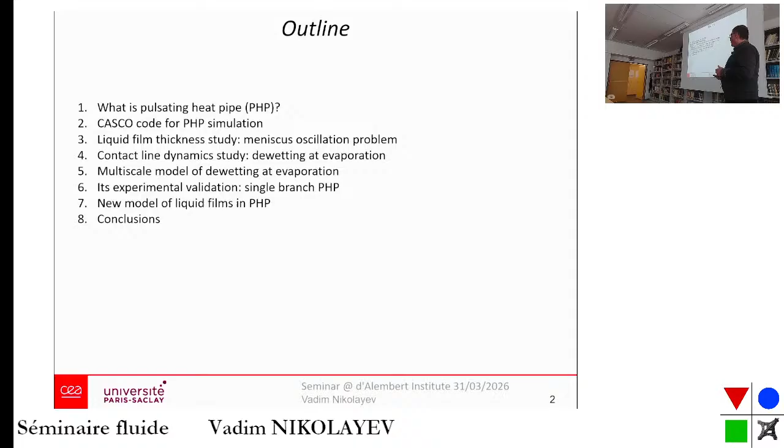So first I will explain what it is. Then I'll tell a little bit about the design of PHP, a method of this design, which is the only way of designing it - it's direct simulation, in fact, because it's too complex. Then I will tell about some bottlenecks in the simulation models, which concerns the liquid film modeling. First, I will speak about the liquid film thickness modeling, and then liquid film length modeling, involving the contact line dynamics. Here I will speak a little bit in more detail about the dewetting at evaporation. And then I will conclude.

So what is the pulsating heat pipe, and heat pipe in general? It's a device that serves to transfer heat from one point to another - either to cool down electronics or just recover the heat, whatever. It makes use of reversibility of latent heat exchange. So what happens is that you evaporate at one side, you accumulate the latent heat in the vapor, and then you transfer the vapor to the condenser part, you condense it, and you give back this latent heat, basically.

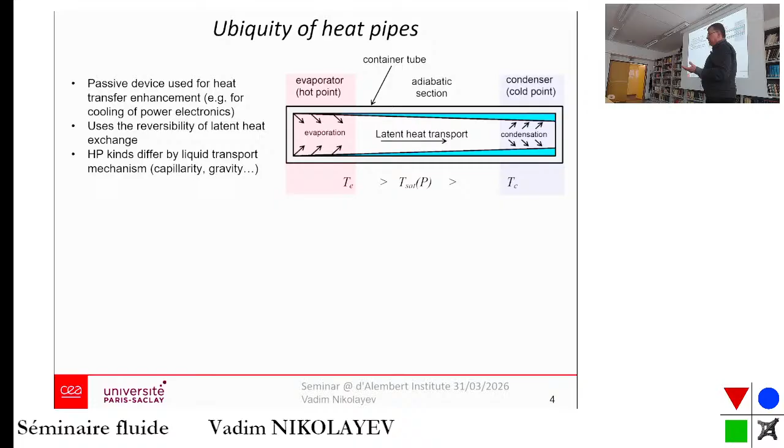So heat pipe kinds differ by liquid transfer, because vapor is transported just by its expansion, right? When you generate more vapor, it proliferates easily. But the liquid is another story - you need to transport liquid to the evaporator part, and this is done in many cases by capillarity. For instance, in every mobile phone now there is a liquid which circulates that cools down its processor, and it's the case of all mobile phones now. In every computer, in every more or less powerful heat-emitting device, there is a heat pipe now. Here you have, for instance, the Hubble Space Telescope cooling system.

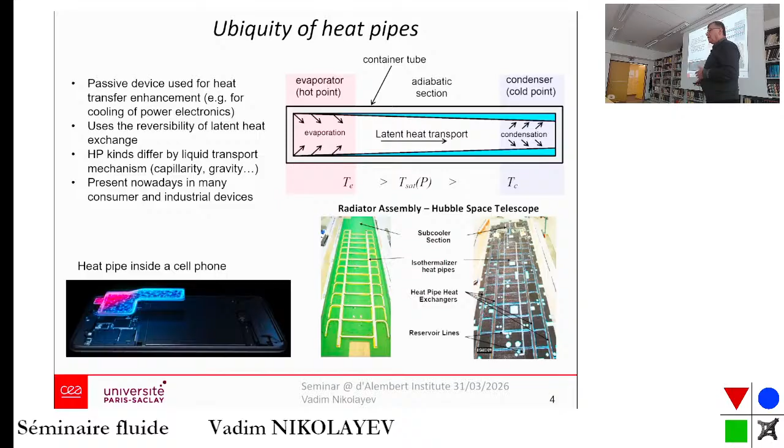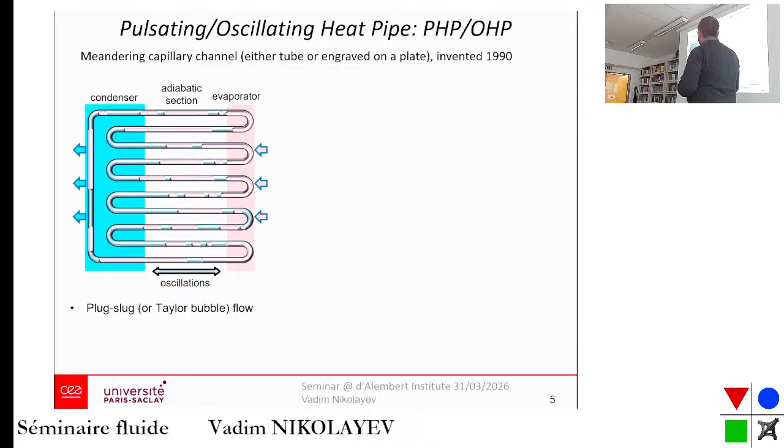So what is the pulsating heat pipe, called in some parts of the world - in China and in the United States - oscillating heat pipes? It's the same thing. It's a very simple structure - a meandering capillary channel, a tube or engraved on a plate. It was invented, by the way, quite recently with respect to other kinds of heat pipes. So it's a meandering capillary tube. You put some fluid inside and they form liquid plugs and vapor bubbles inside, and when you apply a difference of temperatures at the condenser and evaporator parts, a miracle happens: the whole train of bubbles and plugs begins to oscillate spontaneously.

So you see here an example of such an oscillation, and such a device is very attractive for industrial applications because it's very simple, reliable, light, and easily integrable - you can configure it for any geometrical configuration - and in addition, it's extremely efficient. It can transfer kilowatts without any problems, just because fluid motion washes the dry areas once they are formed. Because the problem for capillary heat pipes, for instance, is that at some heat flux you have dry-out of the evaporator part, and it ceases to function. Here you have motion of fluids, so it helps to increase these limits, the maximum heat flux limits.

However, it involves multiple length scales. The channel length for this one, for instance, is 50 grooves of 27 centimeters - it's about 14 meters, a big length. And you see that there is some correlation of motion on this length, so you have a proliferation of some waves, pressure waves. So you have a kind of collective motion, which is a very interesting phenomenon to be studied by itself.

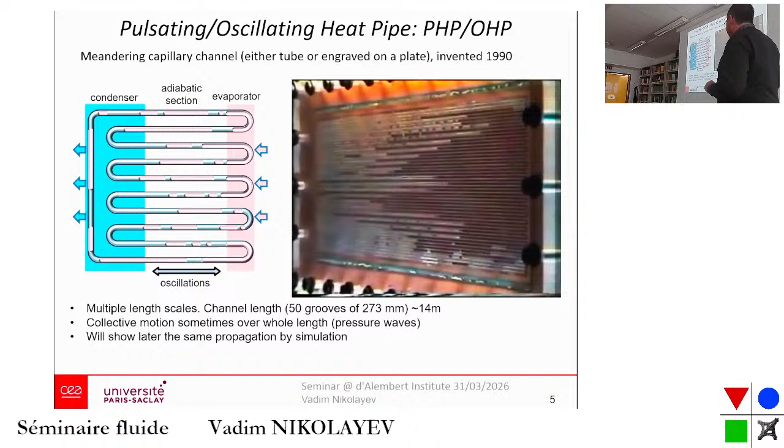But I didn't find any better, so I will show later the same propagation of waves by simulation.

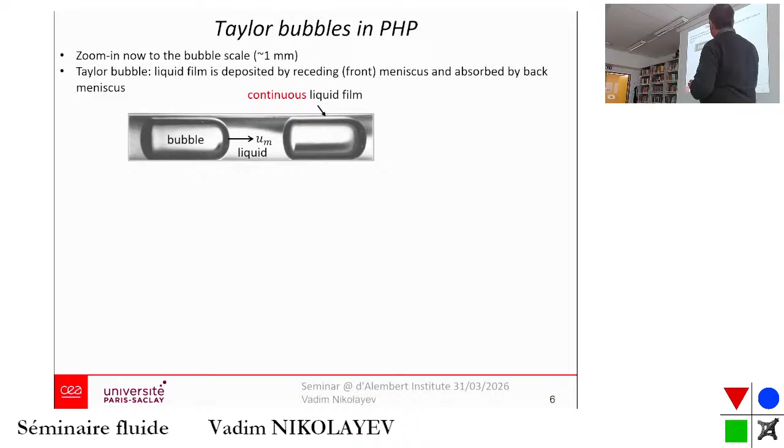So let's now go down to scale, to the millimeter scale, which is the scale of the Taylor bubbles inside the PHP. And when there is a motion of such bubbles squeezed in a channel, you have a deposition of a continuous liquid film on the walls of this channel.

The thickness of this film is given by the formula derived by Aussilou and Quéré. It's a very well-known correlation, which involves the capillary number related to the velocity of motion of the menisci, the deposit, actually, the film, the front menisci, which recede and deposit the film.

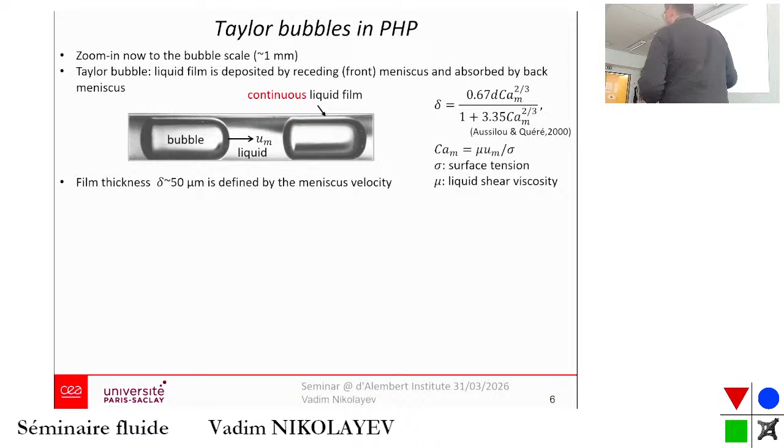The characteristic film thickness is of tens of micrometers, and it is defined by meniscus velocity through this expression. However, the particularity of the pulsating heat pipe is that the film partially evaporates, thus in the evaporator, creating the triple contact lines.

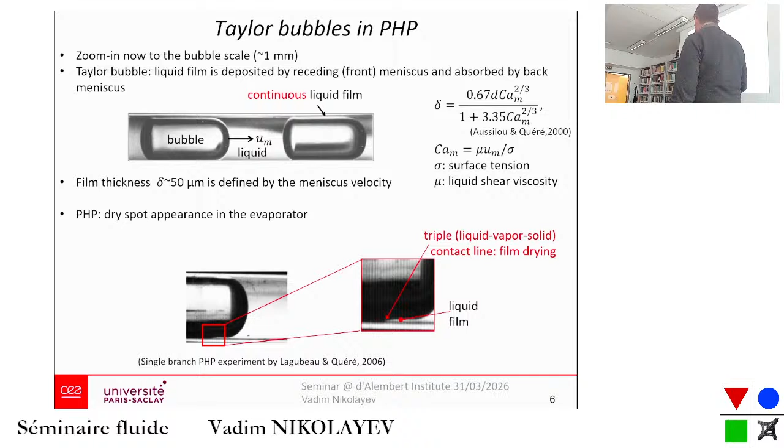So now I will tell a little bit about designing of PHP and the code we developed. It's French, it's called CASCO, a French abbreviation for Advanced PHP Simulation Code: Code Avancé de Simulation de Caloduc Oscillant, which is a pulsating heat pipe in French.

Why 1D? Because we need a tool to design the PHP, so the simulation shouldn't last for weeks. It's a trade-off between code veracity and efficiency. But we can simulate only the bubbles of tube size.

So the simulation procedure consists in virtually breaking the PHP loop, projecting it on a straight axis on which the evaporator, adiabatic, condenser zones are situated in a periodical fashion.

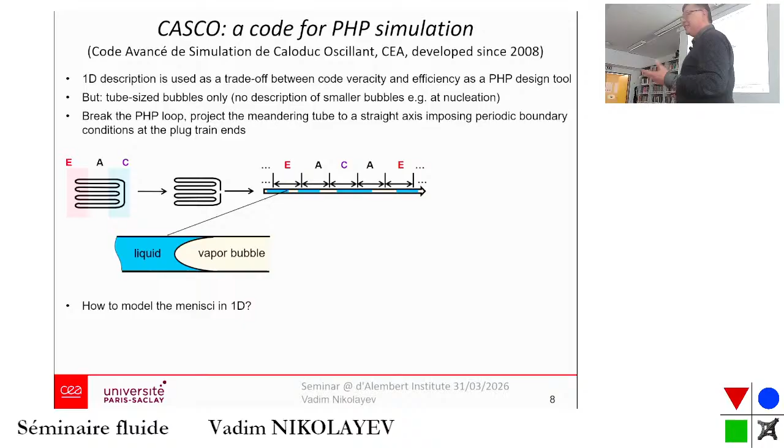So the problem arises how to model the menisci in 1D. What we do, actually, is we replace the curved meniscus by a flat interface with attached films.

And when we simulate the bubble, we need to admit an arbitrary number of dry spots along it, because the bubble can be so long that it extends over several evaporator sections.

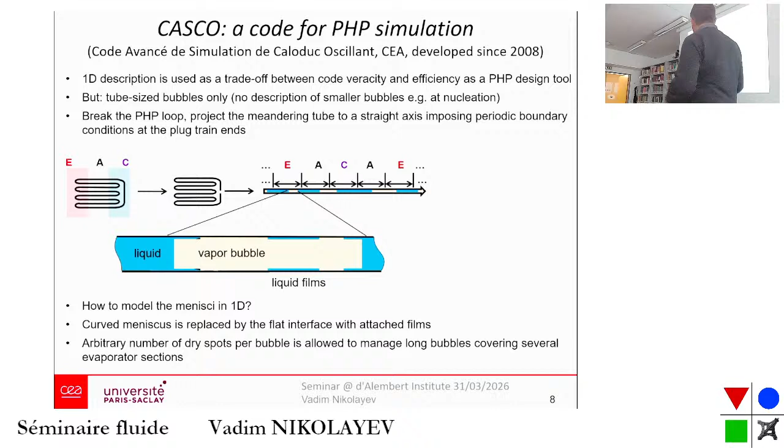So what about internals to CASCO? It's limited to the plug-slug flow regime, so it's bubble plug, but in engineering we call it plug-slug.

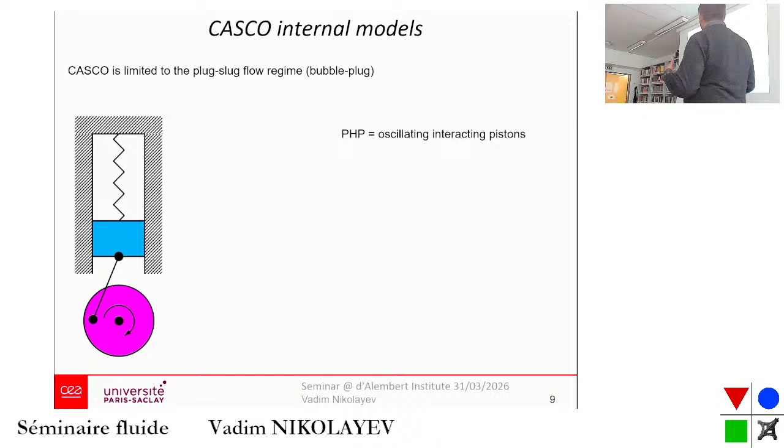So we simulate the pulsating heat pipe as a set of oscillating, interacting pistons, and they're interacting through the elastic medium, which in this case is compressible vapor.

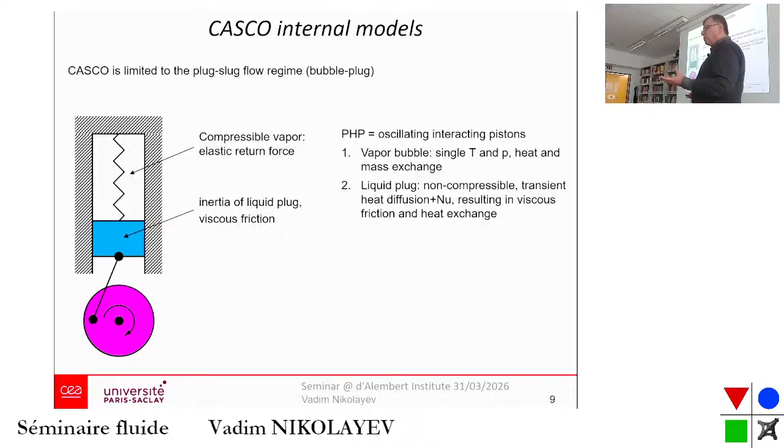And it creates the elastic return force in this system, without which the oscillations are impossible. So the liquid plugs create the inertia and, of course, a viscous friction, which limits the oscillation amplitude.

And the motor of oscillation is the phase change evaporation-condensation, and mainly it occurs through the liquid films deposited on the tube walls.

In addition, we need to simulate the bubble and plug appearance and disappearance: bubble coalescence and bubble creation, basically by boiling.

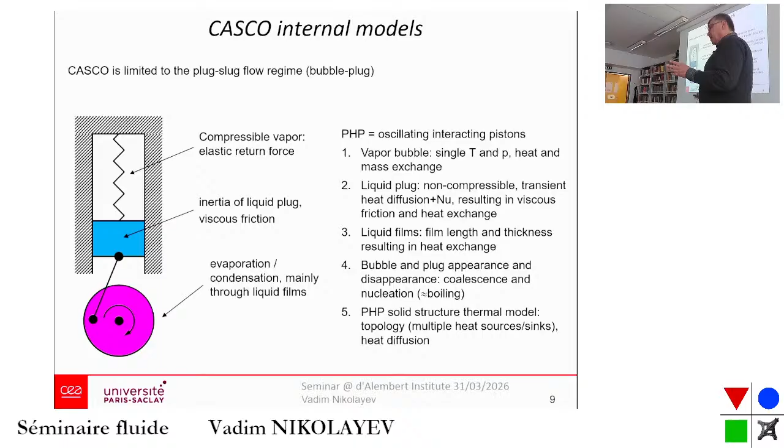And we need to simulate also the heat diffusion in the PHP solid structure, which is an important point, and it takes a lot of simulation time, actually.

The CASCO general structure begins with its initialization. Then you progress in time and solve one time step for all these models I described.

However, there is a particularity in the system, because some plugs or bubbles may become negative numerically, so you need to cure this. If you progress with such negative things, it becomes absurd and the code collapses.

So you need to actually break from this loop, eliminate the bubbles and problematic plugs, and return to the beginning of this time step.

Yes, I mean, negative length or negative mass or whatever, negative temperature, well, something abnormal.

So you need to cure this issue, and you return to the same departure point, and you redo this time step.

And after this time step, you need again to check if everything is all right, and if other transformations of the system are needed, like adding of bubbles, for instance, if local conditions of boiling are satisfied. Then you save the PHP state if requested, and you return back to perform the next time step.

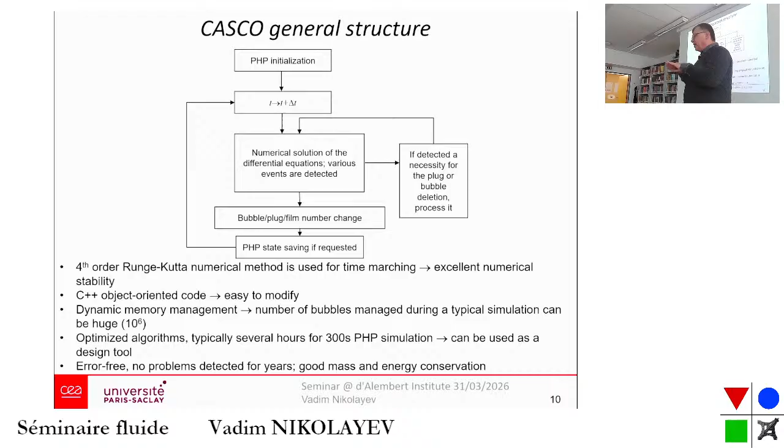The code now is error-free, no problems detected for years. It provides very good mass and energy conservation, so we don't need to reinitialize the mass by perturbing the system on the run.

I'd like to speak about the most important bottleneck in this code, which is the liquid film model. The films are modeled with constant, imposed film thickness. We need to implement something really simple in this model, so we chose this way.

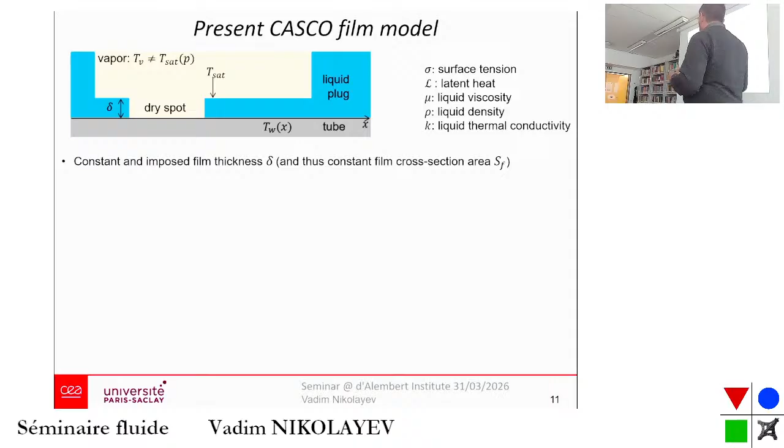Every film has a fixed thickness delta, and evaporation-condensation mass flux is defined by the interfacial energy balance. It's a classical way of describing evaporation or condensation of the film: the heat flux arriving from the wall is balanced by the latent heat generated at the liquid-vapor interface.

Another point is the film length. As the films are of constant thickness, we need to conserve the mass. So what we do is provide such a velocity of the film edge, the contact line, to conserve the mass. It's basically driven by condensation or evaporation: you evaporate, you reduce the film length; you condense, you increase the film length.

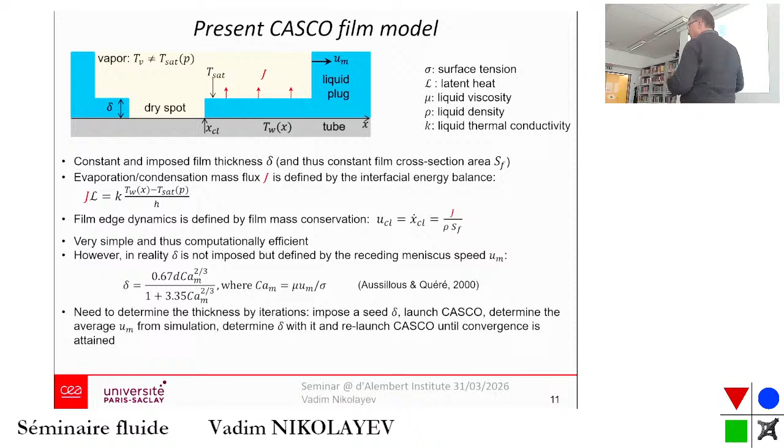This method is certainly very efficient computationally, but in reality things are very different. First, the film thickness is not imposed, but defined by the receding meniscus speed, so we need to adjust somehow the thickness, which we don't know in the beginning.

What we do right now is a loop outside CASCO: we impose some thickness, launch CASCO, determine the average plug speed from the simulation, then inject this plug speed into the formula, calculate a new thickness, and so on until this procedure converges. Actually the convergence is extremely quick, so just a few iterations are sufficient.

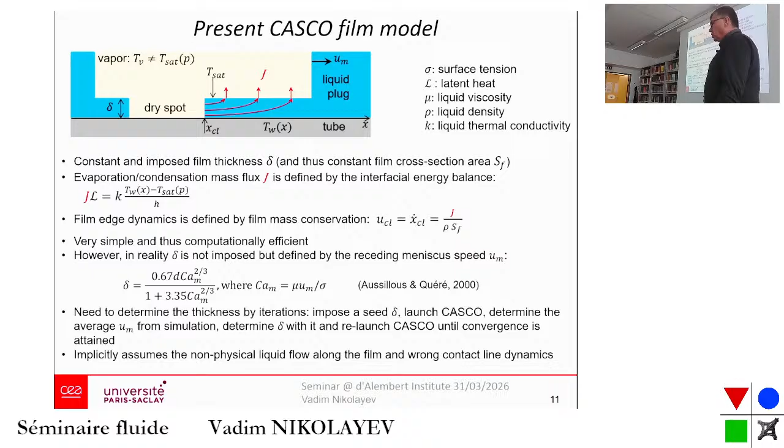The main problem is that we assume the flow along the film, which is physically incorrect. For instance, at evaporation we reduce the film length, so we assume this mass flows along the film, which is absurd. In addition, the contact line dynamics is completely wrong. We need to cure all those issues.

However, the code works quite well. I'd like to speak about one application we do in collaboration with Airbus Defence and Space, for cooling power electronics of satellites. This is not, of course, the industrial prototype, it's more a test prototype. I don't have the right to speak about the industrial things, obviously.

It's a 16-turn tubular PHP made of copper with 1 millimeter internal diameter. It has 2 aluminum spreader plates which serve as condenser and evaporator. Here you see its size; it was the subject of a postdoc by Slaven Basić, which ended just 3 months ago.

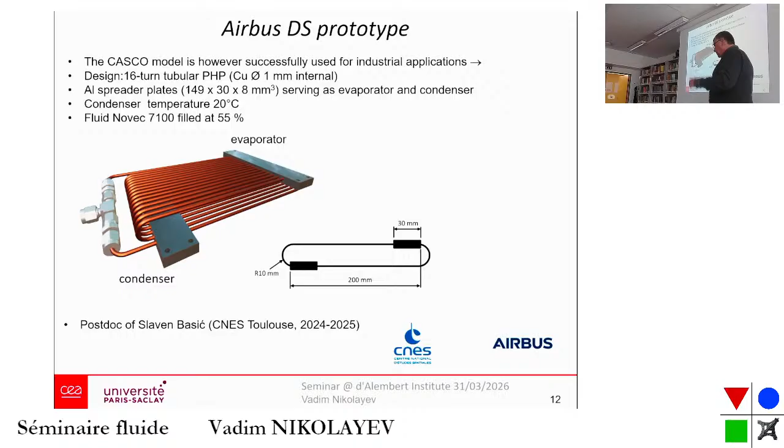Here is a CASCO backend visualization of the PHP functioning. The color code: blue is liquid plugs, violet and gray are vapor bubbles, and violet is liquid films. So you see the drying and rewetting of dry spots by oscillating liquid plugs, and also those pressure waves propagating in the system, making this motion collective.

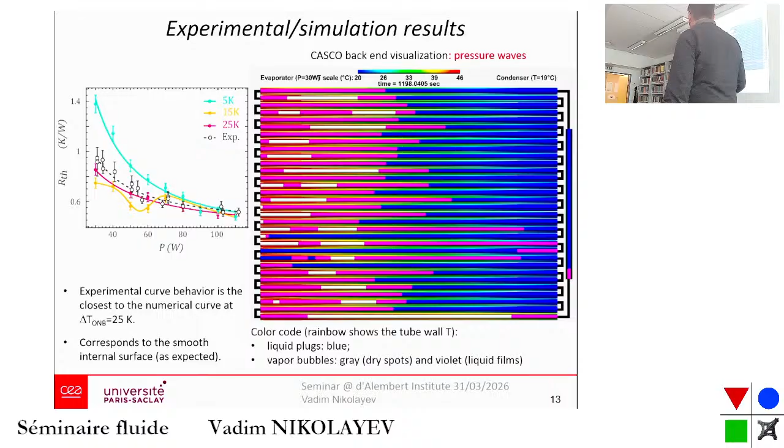This is quite an efficient mode of functioning, but there are many others, of course. What happens is that when you plot the thermal resistance of such a device with respect to the input power, you get this decreasing curve, which is characteristic for heat pipes.

These are experimental data, the symbols, and you have several simulation curves. The parameter of these simulation curves is what we call the ONB threshold, or onset of nucleate boiling threshold, sometimes called the nucleation barrier, which is actually the superheating of the tube needed to generate vapor bubbles. It's a very important parameter because boiling is extremely important in this system.

You see that the agreement with the experiment is provided for this value of 25 Kelvin, which corresponds actually to quite a smooth internal surface, which is expected for this experiment.

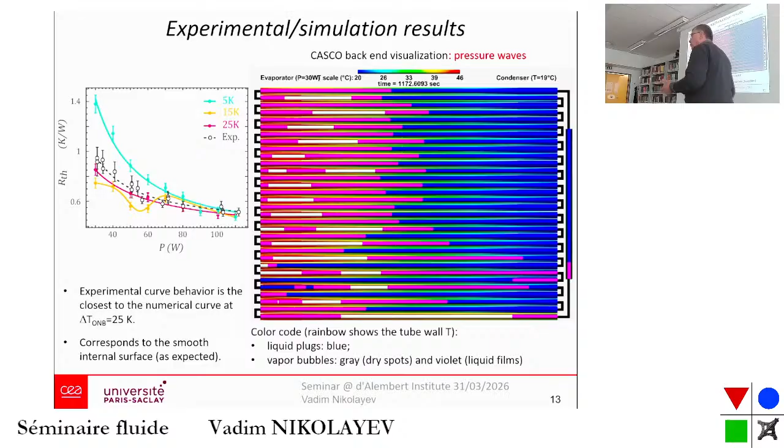Let's speak about the liquid film thickness study, and I will speak about the meniscus oscillation. What we do is try to calculate what happens in a tube, what happens with the liquid film attached to the meniscus, when you oscillate the meniscus.

When it goes back, it deposits the film. When it runs over the film, it absorbs the film. So it's a Bretherton-like problem for the film thickness.

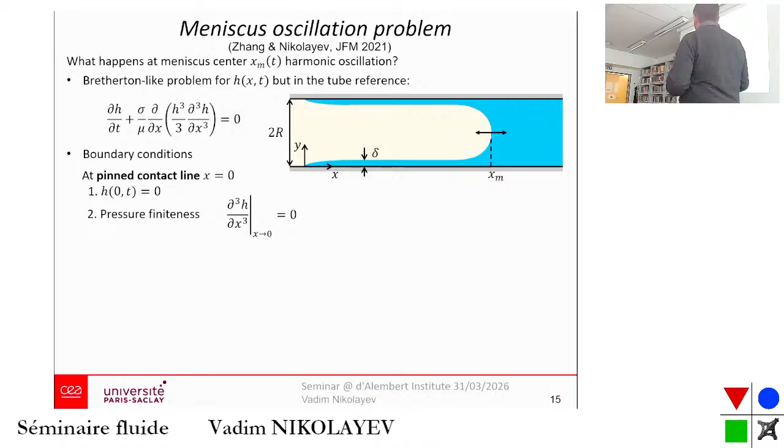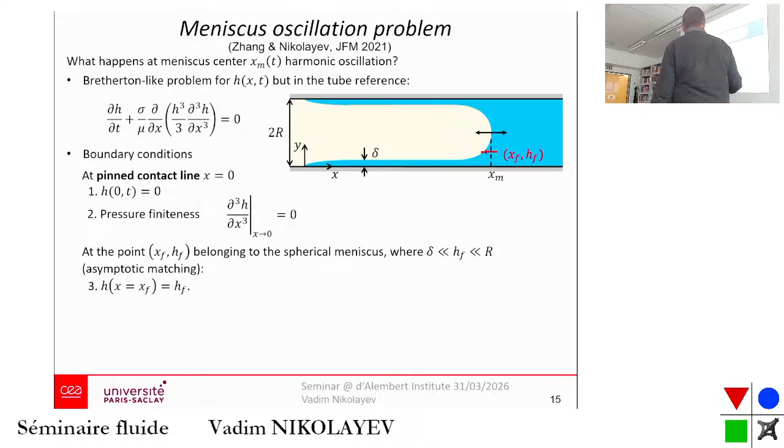We solve it in the tube reference because of the oscillation, unlike the Bretherton problem. The contact line is pinned, so we do not consider what happens near the contact line in this part of our study. The pressure is finite, so there's no singularity problem at the contact line, and boundary conditions on the other side are introduced at a point which is quite high, where the film is thick—much larger than film thickness, but much smaller than the other scale in this problem, the tube radius. Thanks to this scale separation, we can make such a hypothesis.

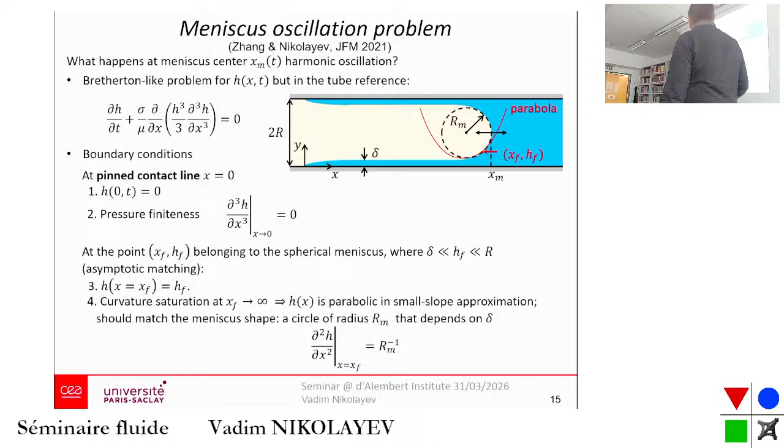As the curvature saturates when you go further away from the contact line, we have a parabolic solution in the small slope approximation, which is the lubrication approximation used here. It should match the meniscus shape, which is spherical—the profile is a circle of radius Rm that depends on the film thickness itself. So we need to solve this problem, and the result is here, compared to the experiment which was done just for liquid plug oscillation.

You modulate the pressure from one end of the tube with some periodic pressure changes, and the pressure from the other side is fixed. It was done with pentane in contact with its vapor.

You see the position of the plugs. There is one phase where the meniscus of the liquid is receding, and on that stage you deposit the film, and the film has inhomogeneous thickness in space just because the velocity of the plug changes in time. So it can be compared to this experiment where people measured the film thickness locally.

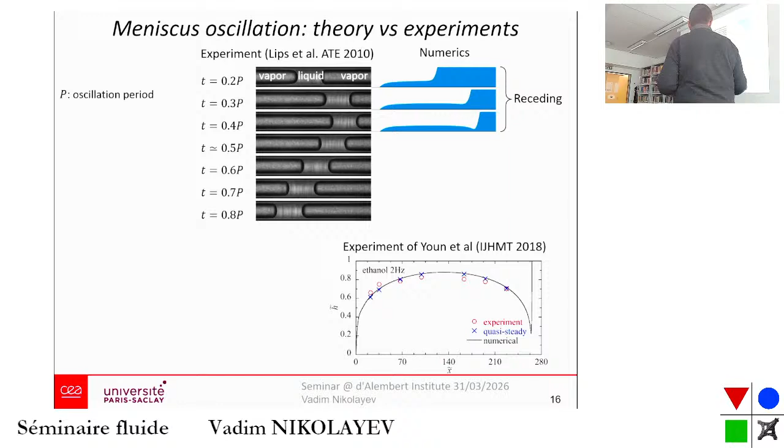The line corresponds to our simulation, the dots correspond to the experiment, and the crosses correspond to the Bretherton formula applied locally at each particular time. It's a quasi-stationary oscillation, which shows basically that there is no dynamic flow related to the meniscus motion.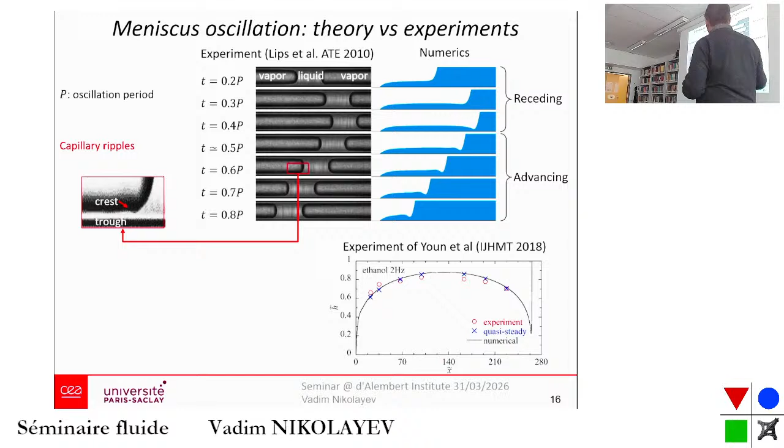At the advancing stage, there are capillary ripples formed close to the advancing meniscus, which you've studied a lot, I believe. There is agreement between simulation and experiment, and we were happy about this.

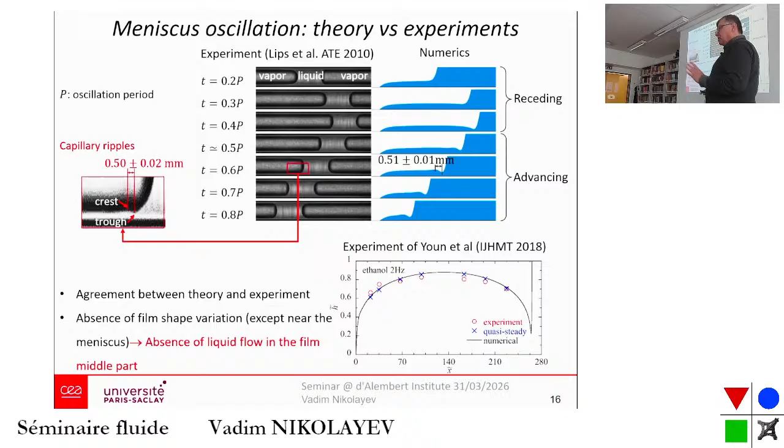What you need to mention here is that if you look at the film thickness, you see that the film doesn't change its shape throughout the oscillation. So in the middle part of the film, there is no flow—the flow exists only near the meniscus. In the middle of the film, no flow, so we can assume it to be quasi-stationary.

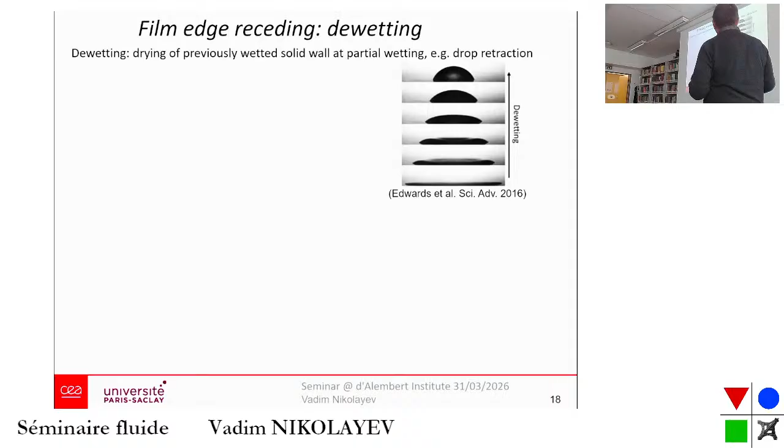Let's speak now about what happens near the contact line—it's much more exciting. When you consider a film, you have a dewetting phenomenon. Here you see dewetting of a drop post, just at isothermal conditions. When you put it on some surface, it begins to retract, and when it retracts, it forms a ridge, because the fluid previously situated on the solid cannot flow inside the film because of strong hydrodynamic shear.

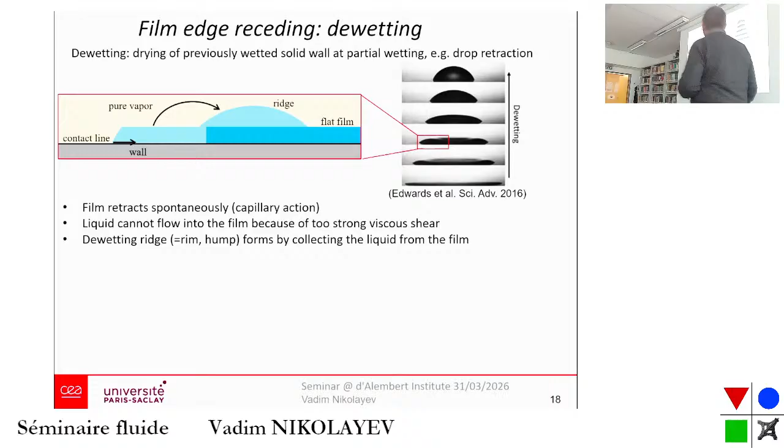So it forms a ridge, visible here at the edge of the film, called the dewetting ridge, rim, or hump—many people use different words for it. It collects the liquid from the film previously situated on the solid.

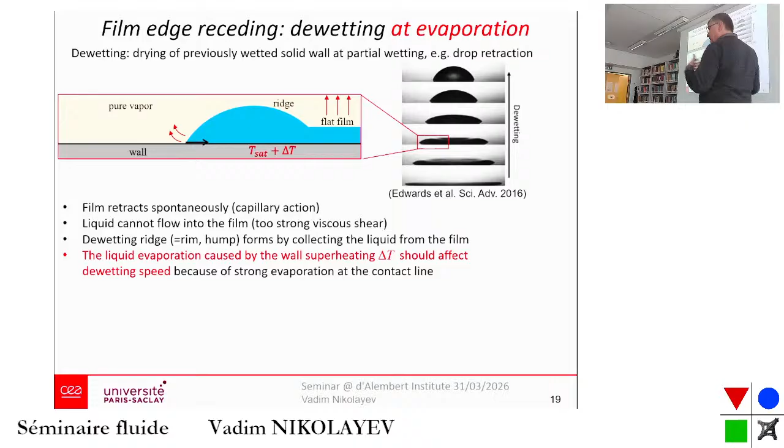So what happens at evaporation now? Of course, you have some evaporation from the flat part of the film, but you have very strong evaporation here from the contact line region, because the film thickness is small there, so it should affect the dewetting dynamics.

To find out what happens in this situation, we again solve the lubrication problem, and we include the evaporation heat flux and several other phenomena—first of all the Kelvin effect, which is the dependence of the saturation temperature, and then of the evaporation flux, on the local curvature. The saturation temperature varies along the liquid-vapor interface, thus creating Marangoni stresses, which is a corresponding term here.

You also need to relax the contact line singularity, so you introduce the slip length via the Navier-Stokes equations and the Navier condition—the slip length LS appears here. What you introduce instead of describing the motion of the ridge is to move the substrate in the opposite direction, so there's a term corresponding to this contact line motion.

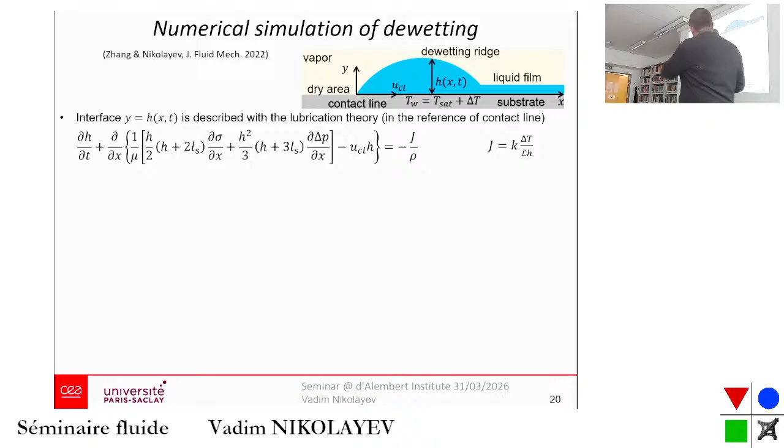Yes, because in this particular problem we impose homogeneous heating. So this superheating with respect to the saturation temperature corresponding to the pressure outside this film is homogeneous. But in principle it can be inhomogeneous, and the liquid would have different temperatures at different points, because it follows the solid temperature. But in this particular problem the answer is yes.

To relax the contact line singularity, you have two effects. First, hydrodynamic slip, which is well known to relax the contact line singularity. The other effect is the Kelvin effect, which relaxes it too. While hydrodynamic slip proves to be more important in most cases, we keep the Kelvin effect because it makes the pressure at the contact line finite, which is very convenient for numerics.

We do not consider the other side. We just impose the boundary conditions of an infinitely flat film, because we know that what happens near the contact line is completely decoupled from what happens near the meniscus, since there is no flow in the middle part of the film. So here we impose the flat film conditions.

However, this flat film decreases in time, its thickness decreases because of evaporation. There is some dry-out time, which we call T dry, the time needed to completely dry out the film. But we never actually reach this time, because in all practical situations it is too big with respect to characteristic times. So we don't need to consider the film disappearance because of thinning.

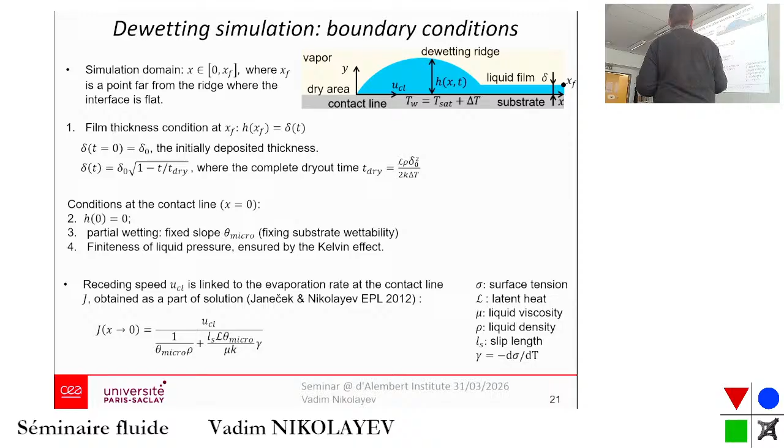The second feature is that the contact line velocity increases with superheating, meaning the dewetting is accelerated by evaporation. That's a very important fact, because this effect is extremely strong. In all practical situations we encounter, films disappear not because they thin to zero, but because they retract. For instance, the micro layer in boiling, also a thin film, disappears not because it depletes or thins to zero, but because it shrinks, its length becomes zero.

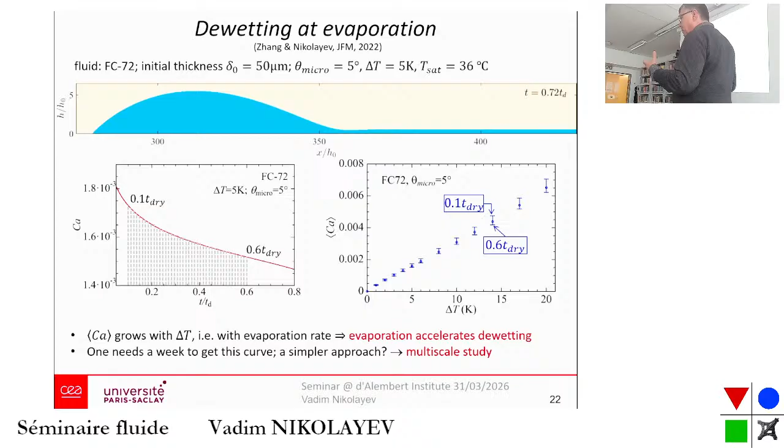But as you may guess, to get such a simulation you need a week of calculation, so it's not practical to obtain, and we want a simpler physical model. For this we need a multi-scale study, because multiple scales are involved in such a phenomenon, and the smallest of these scales is the vicinity of the contact line, which we call the microregion.

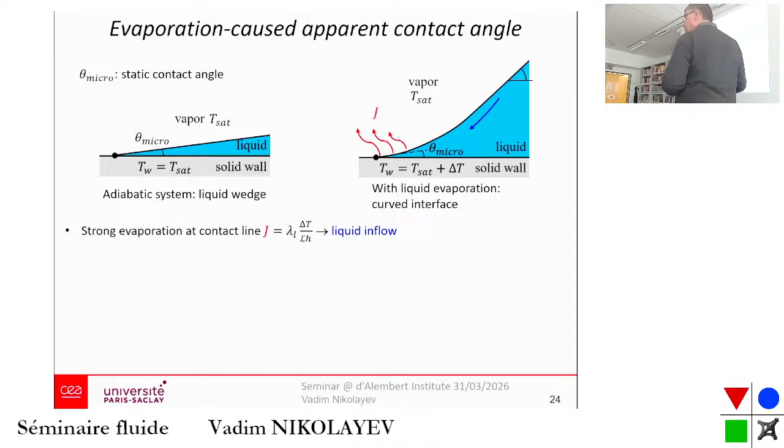In this microregion, without evaporation, it's a liquid wedge. With evaporation, this wedge becomes curved, because you have very strong evaporation near the contact line, which causes liquid inflow to the contact line. This effect is extremely strong on small scales, so you have a viscous pressure drop associated with it due to viscosity. The pressure at point A should be larger than at point B, while on the vapor side nothing happens, so the pressures are the same.

So the pressure jump that defines the curvature leads to the inverse difference of curvatures. The curvature at point B is larger than the curvature at point A. It's very simple, it comes from the Laplace law.

Immediately you see that the interface curvature increases near the contact line, which leads to such a bending of the interface, and a big difference between the microscopic contact angle and the contact angle farther away. It's the apparent contact angle, which we will not call apparent, but we'll call Voinov, because it's the angle which is not related to the contact line motion. It is the angle related only to evaporation or condensation.

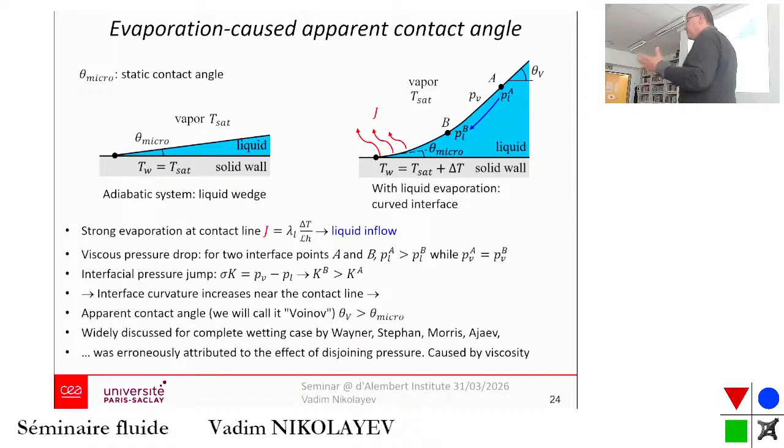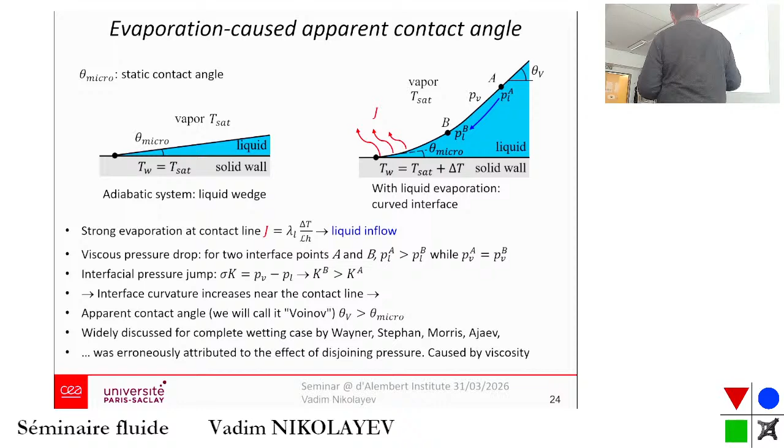This is a problem widely discussed for the complete wetting case, for instance, and most commonly it's attributed to disjoining pressure effects, which is not correct. It's an effect of viscosity. So whatever you use as the singularity relaxation mechanism, it will exist.

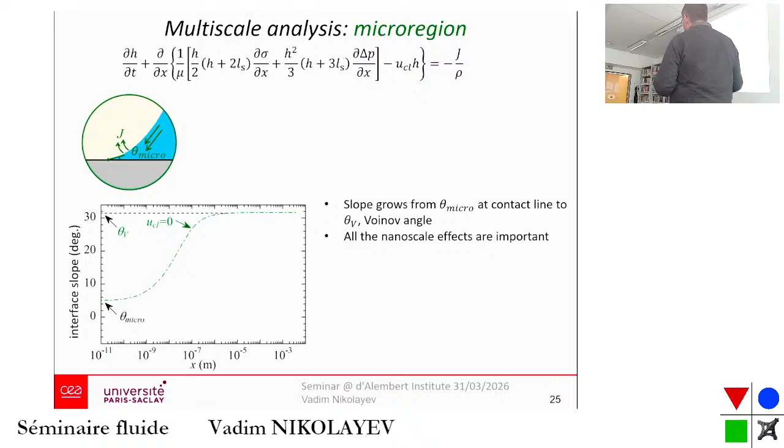Now we come to the multi-scale analysis of this equation, which is quite complex and has many terms. We see here the interface slope variation along the bubble interface, along this wedge, shown graphically on a semi-logarithmic scale. At small scales the slope corresponds to the microscopic contact angle, while farther away it saturates to this Voinov contact angle value.

If you now compare this with the numerical curve calculated for the overall interface, you find that the microscopic scale provides a very good fit of the curve in this region, which means that the flow due to contact line motion is much smaller than the flow induced by evaporation and condensation. This can be proved by scaling analysis, which we did in 2013.

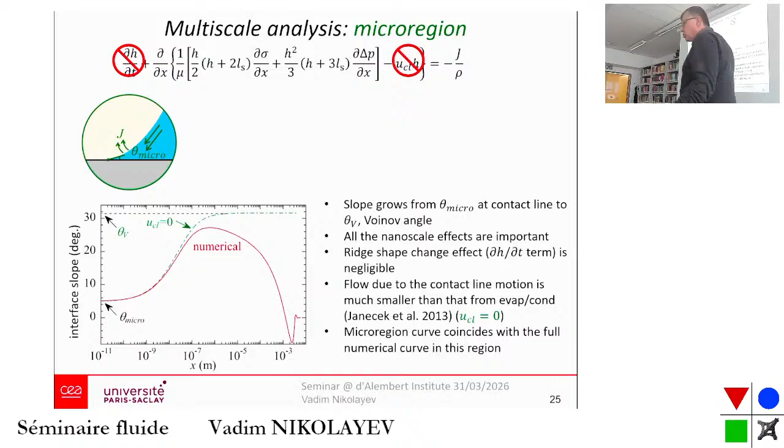So in the microregion, you can safely neglect this term, and the other term which describes the growth of the ridge, since it's a much more macroscopic effect that you can ignore on such small nanometer scales.

Next scale is what we call the intermediate region, where the flow induced by contact line motion prevails over all the nanoscale effects, which you can forget here, as well as the effects created by ridge growth. So it's a dynamic contact line problem that is well known in the literature, and it was solved in many papers.

The first one is Voinov's, who derived an expression that gives you the slope as a function of distance x. You can fit this curve with this law, which gives us a microscopic length, because when x equals LV, this term disappears and the slope equals the Voinov angle. You find this LV as the intersection of the Cox-Voinov law and the horizontal line corresponding to theta V. In this case it's 20 nanometers, which corresponds to the Voinov length induced by the slip length here, chosen to be 10 nanometers.

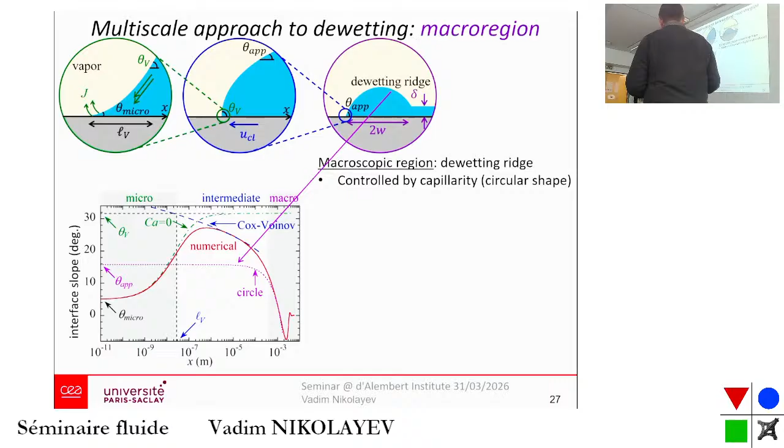Now we come to the macroscopic scale, which is the dewetting ridge scale. On this ridge, the dewetting ridge is circular because of the action of surface tension. If you plot this circle shape, the slope in semi-log scale, you get a fit here.

If you do this matching, which was performed by Snoeijer and Eggers in 2010, you get two such expressions. One of them resembles the Cox-Voinov law, but it doesn't involve the arbitrary slope, rather the apparent contact angle visible on the scale of the ridge, and instead of a macroscopic scale, you have the ridge width. Everything is well defined, and the second formula, equally important, gives you the receding speed of the contact line.

We just need to generalize this formula to the wetting case by introducing this Voinov length instead of the particular case of slip length introduced in the original work by Snoeijer and Eggers. So we can use it now in the evaporation case, because this LV will depend on the evaporation rate.

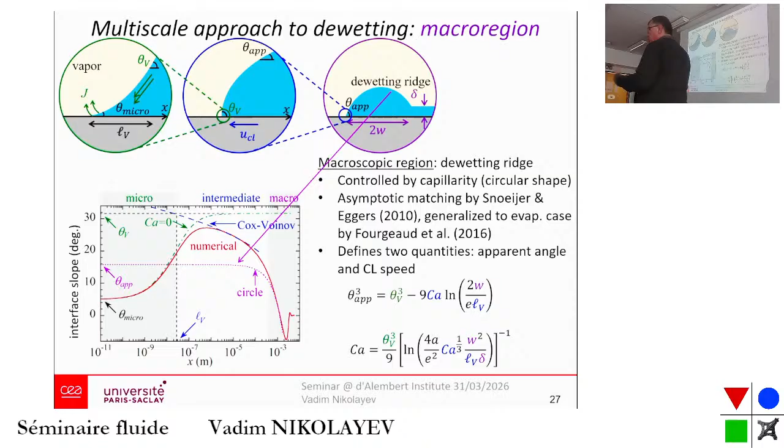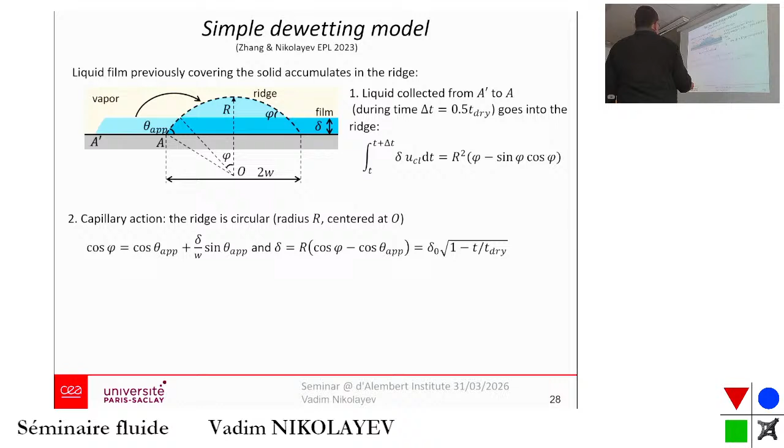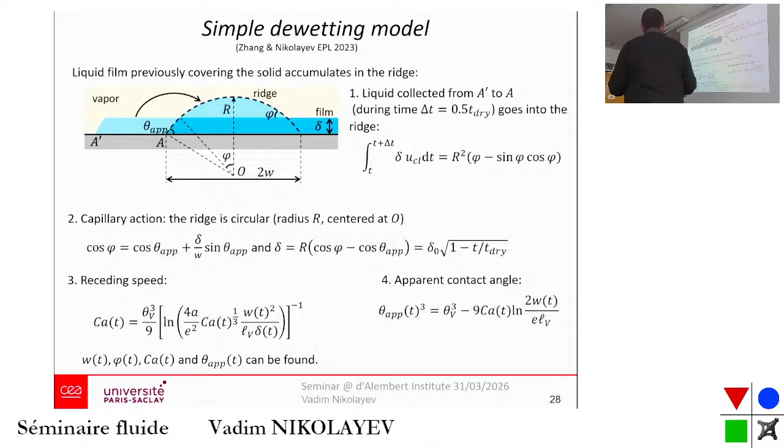So let's create now a simple dewetting model by using it. It involves the geometrical facts I mentioned previously, that all the liquid previously covering the solid accumulates in the ridge, and by using these expressions we come to four equations for four unknowns, which are the ridge width, the slope at the ridge exit, the capillary number related to contact line motion, and the apparent contact angle.

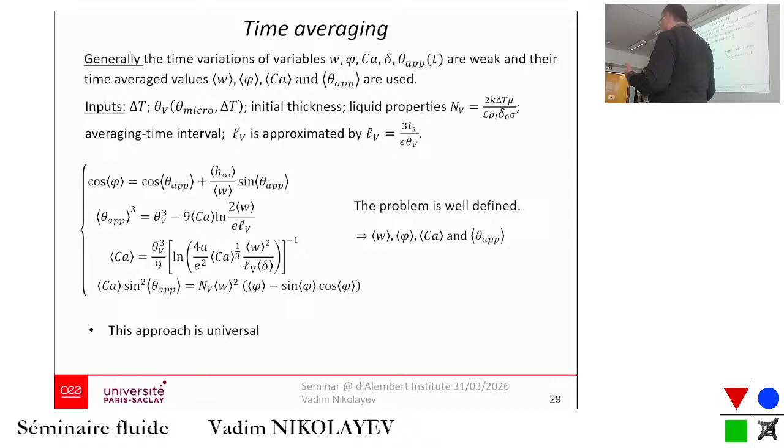So you get all this data by knowing only the Voinov contact angle. That's the only input to this model - the apparent contact angle provided by evaporation in the static case, which can be tabulated as a function of theta micro and superheating. So it now takes seconds instead of weeks to calculate, and you can get this contact line dynamics depending on the substrate superheating for any fluid.

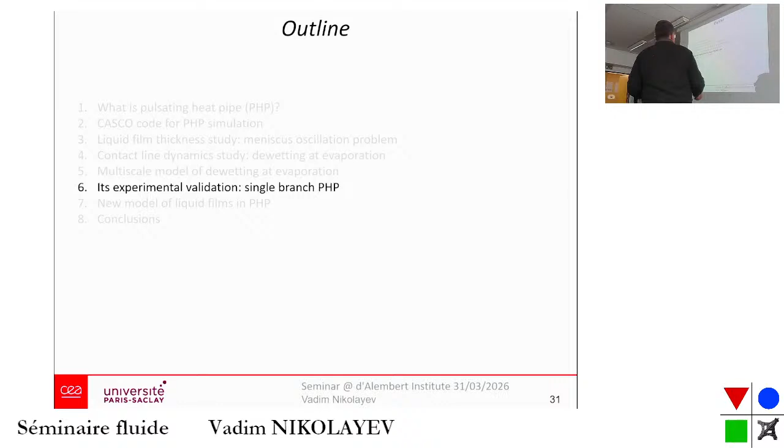Okay, now you can plug in all these models into the PHP modeling. Well, I don't have much time, but we also validated it.

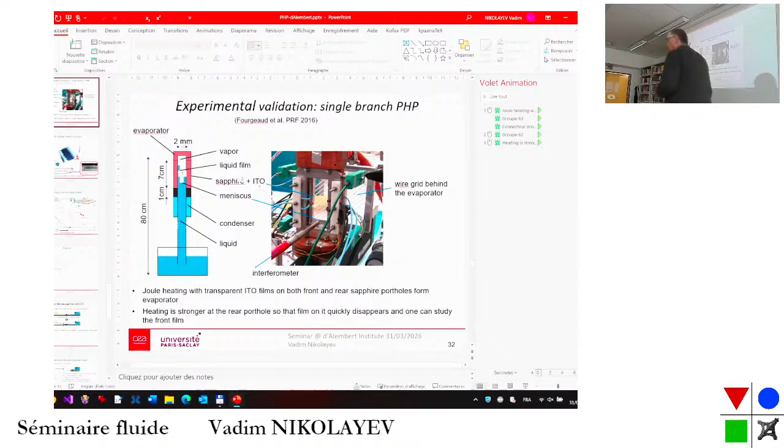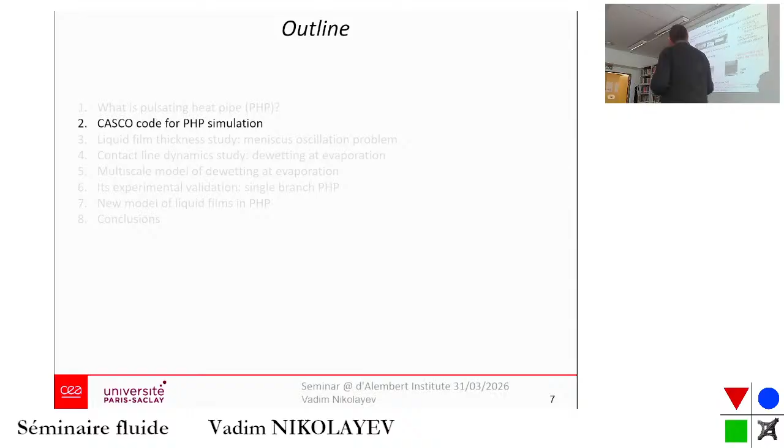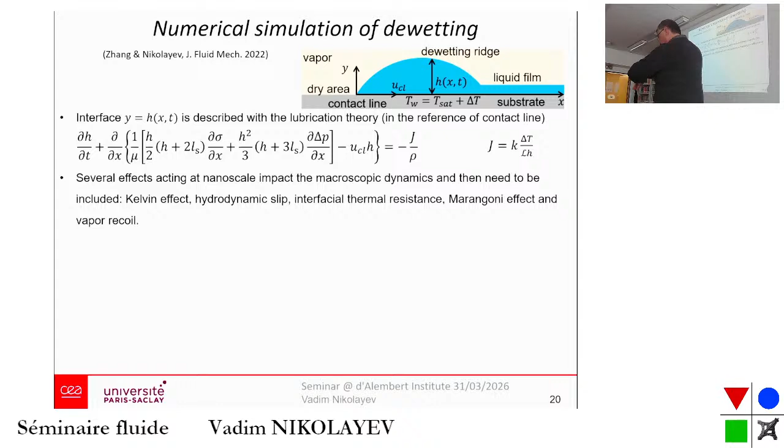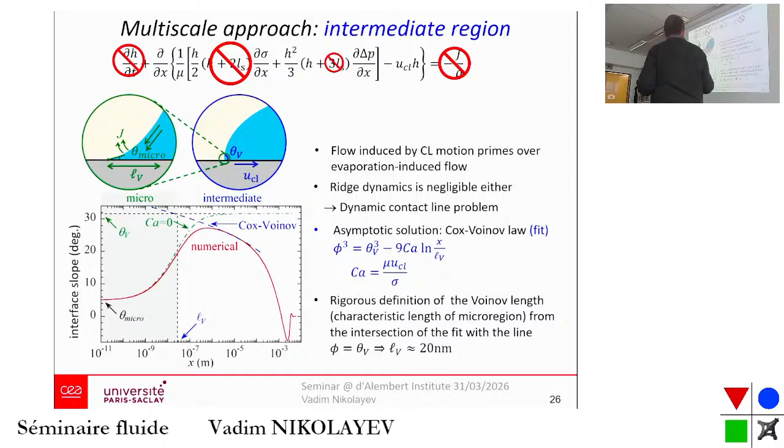So finally, you can verify those - unfortunately I'm short of time to do it. It's okay, I can elongate a little bit. Okay, I will tell you then a little bit about this experiment.

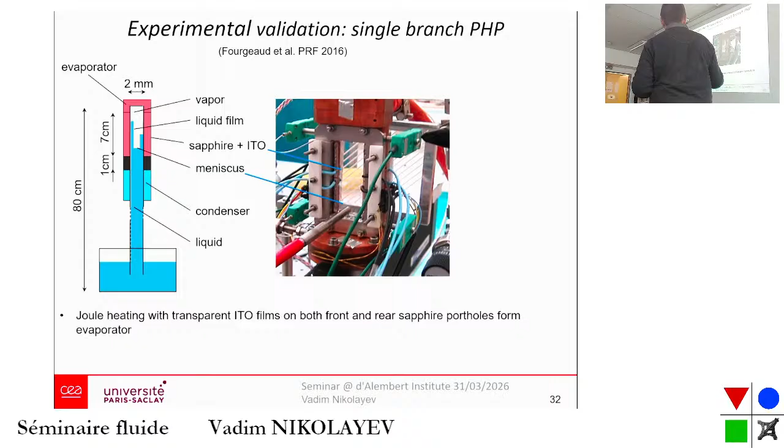So here we used Joule heating with transparent ITO films on both front and rear sapphire portholes - actually there were two windows. Behind the transparent evaporator part we put a wire grid that gave us information about the shape of the liquid films.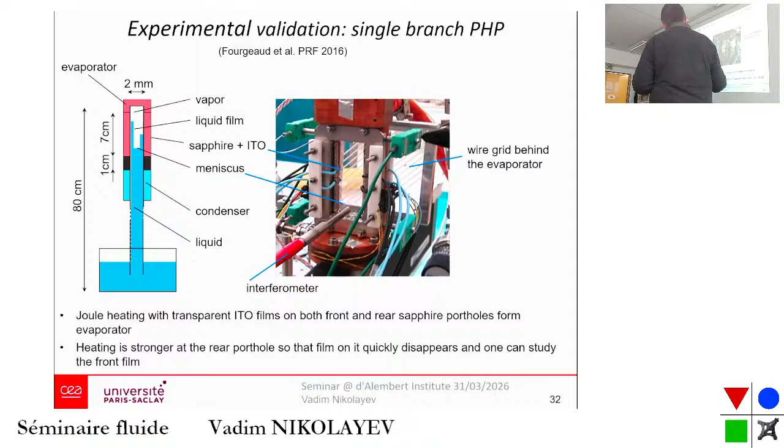In front we have a sensor that provided the film measurement by white light interferometry. The trick we did is put stronger heating at the rear porthole, on the backside of the cell, and you see the image of the grid is deformed. This deformation allows us to calculate the film shape, because just by geometrical optics you can go from the grid deformation to the 3D shape of the film, which looks like this.

So you have these dewetting ridges here, because you have receding of the contact line from all sides. What's important is that you can calculate the apparent contact angle as a function of time in this experiment.

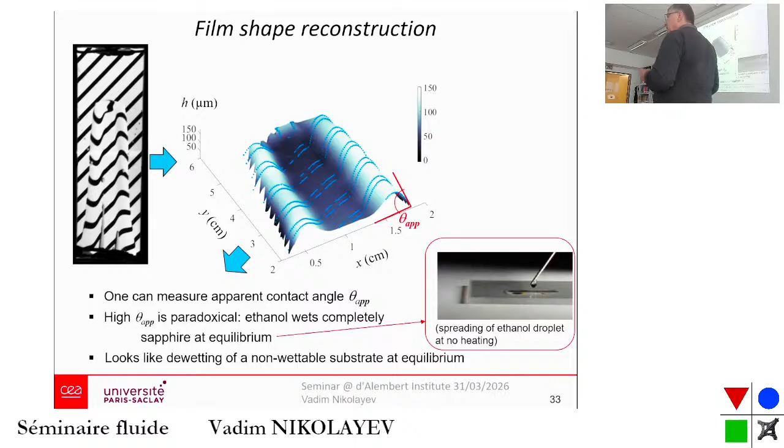We retrieve quite high values of apparent contact angles, which seem paradoxical because here it's ethanol on sapphire, which at equilibrium exhibits very small values. It's nearly wettable, very clean surfaces, so it spreads - the contact angles are just several degrees. But here we retrieve quite high values of contact angle, quite fast receding of the contact lines.

So here is the time evolution of these ridges that you see, and what we can get from this experiment is the time evolution of the contact line velocity and the time evolution of the apparent contact angle, right?

Unfortunately we're unable to measure the local superheating in this problem because it's very tricky to measure everything at the same time. But by comparing the numerical curve of the contact line receding with the experimental decrease of the contact line velocity, we can recover the superheating as a function of time at the contact line.

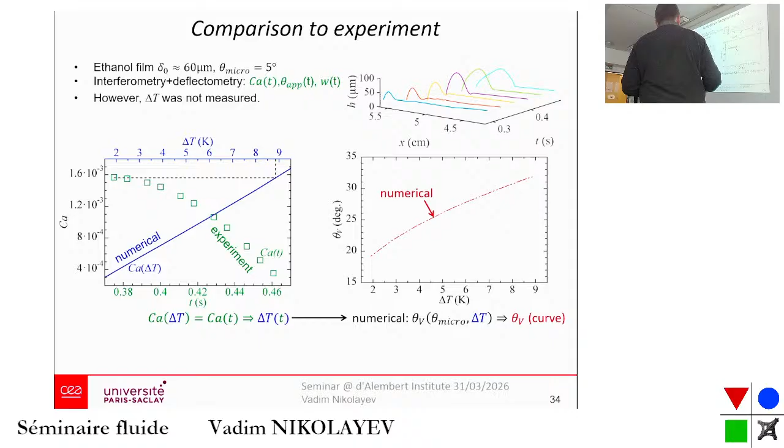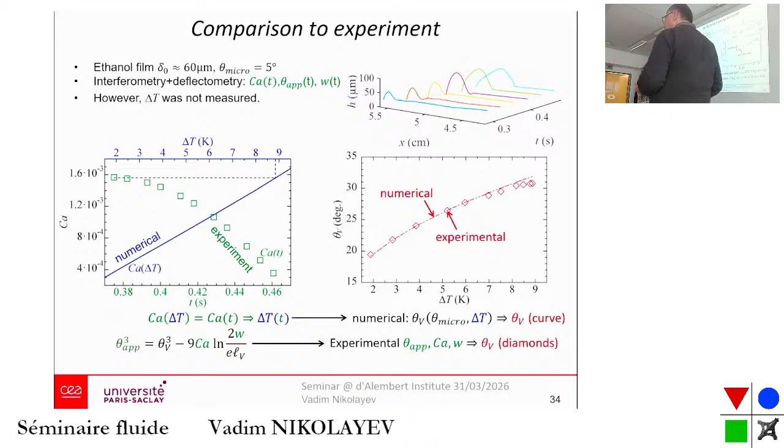By using it, we can plug it into our theory and calculate the Voinov angle as a function of superheating, so we get a curve. At the same time, we can apply the Cox-Voinov-like formula of Snoeijer and Eggers, because we measure the apparent contact angle and all those quantities, so we can recover the Voinov angle and plot it on the same graph. We see good agreement, which gives us confidence we are having something real.

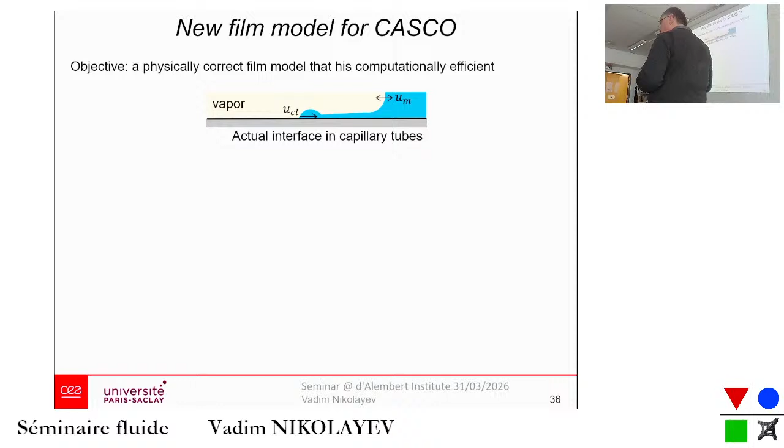So with these findings we construct a new model for CASCO, which is not yet implemented, but there is a difference with the old model because here we do not impose the film thickness, but we calculate it. It's still homogeneous in space, though because of evaporation there is some slope of the film - the film deposited earlier has more time to evaporate, so it becomes a little thinner. But the slope is extremely small - in the experiment I showed you, the slope was 0.01 degrees, so it's really very small.

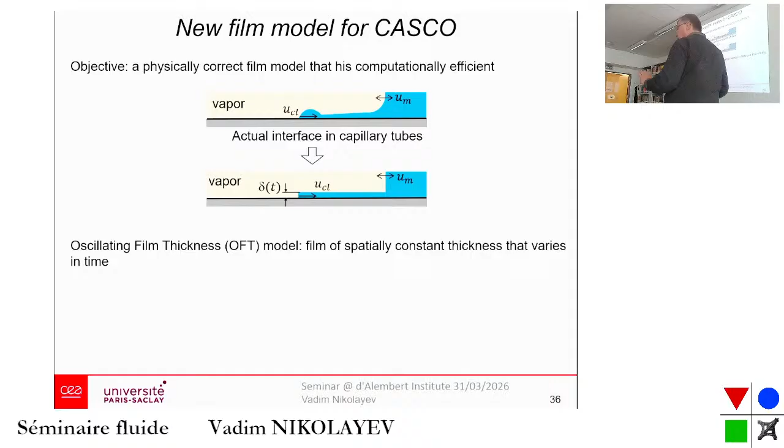So then we need to model the dynamic wetting transition, because you need to find out when the film begins to be deposited on a solid, and under which conditions.

So if the velocity of the meniscus is small enough, you have no film actually, and the apparent contact angle decreases with time. When you oscillate, you increase the contact line speed, the meniscus speed, which is the contact line speed, and at some point you have a transition when apparent contact angle reaches zero.

It's a conventional model of dynamic wetting transition, which is now acceptable. Here it's a Cox-Voinov formula, or more Snoeijer and Eggers formula, that gives us this decrease.

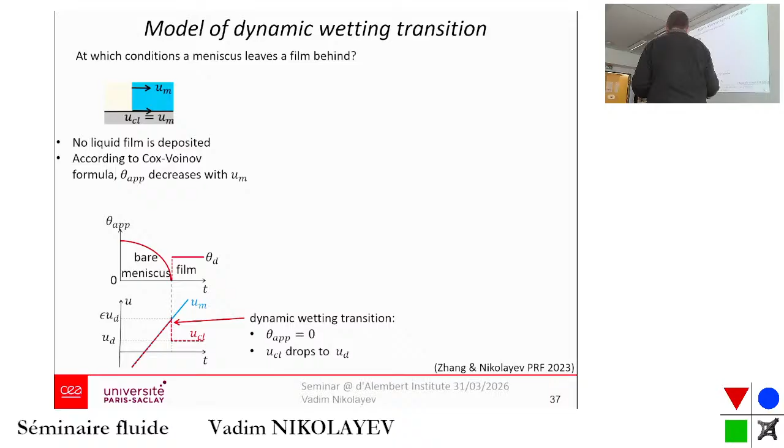At some point you go to zero and the contact line velocity drops to the dewetting velocity, because now you have a film and the contact line velocity is the velocity of dewetting. So it's completely different physics. This is why you have a jump actually.

So we just suppose that the velocity at which this jump occurs scales like the dewetting velocity, which comes from the simulations. The simulation result is from this paper. There's not that much papers on the dewetting transition.

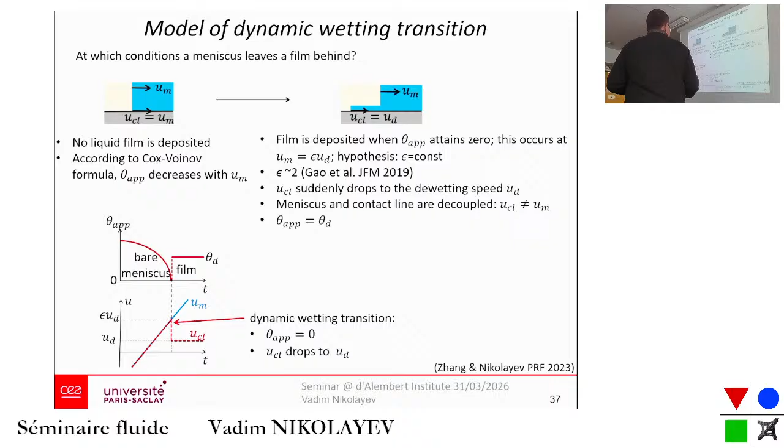So you model it because what you need to model is the film mass variation in time. It consists of two components: increase because of film deposition, and decrease because of film evaporation, or increase due to film condensation, whatever phase change.

When you deposit, you have three situations. You can have a situation where there is no film, so the contact line and meniscus positions coincide. You have already a film, which is a situation of film collection when the meniscus goes over the film, so the film mass decreases, and you have film deposition when there is an increase of the film mass.

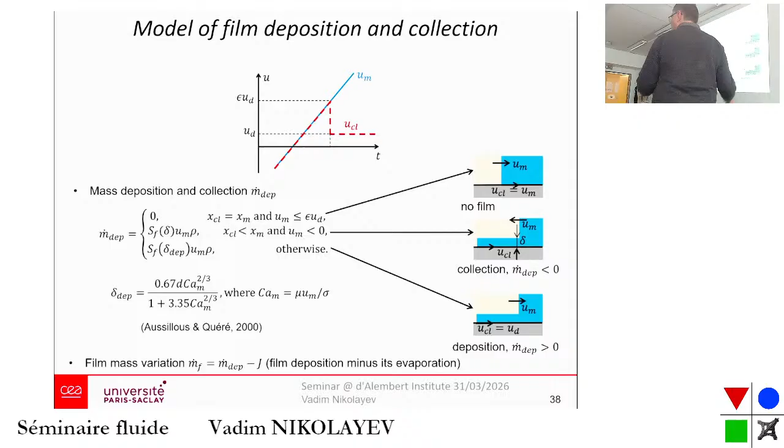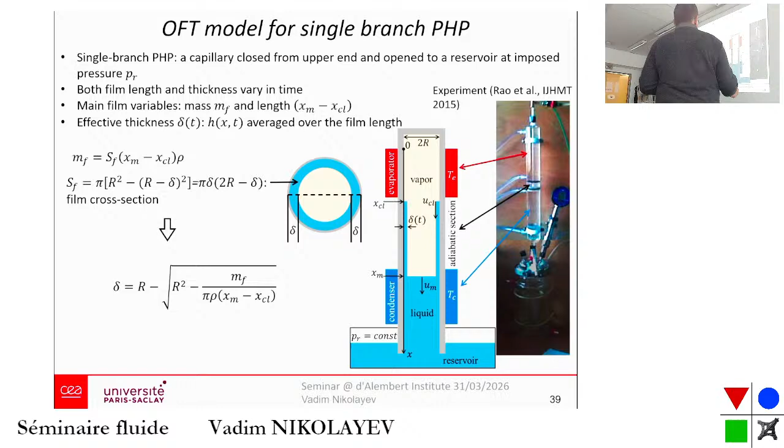You can apply such a simple model to the single branch PHP, which is here. It was an experiment realized in the CETHIL lab in Lyon. Here you have this PHP, and when you compare - this is the experimental video, not very good quality - this is the variation of the meniscus height in time.

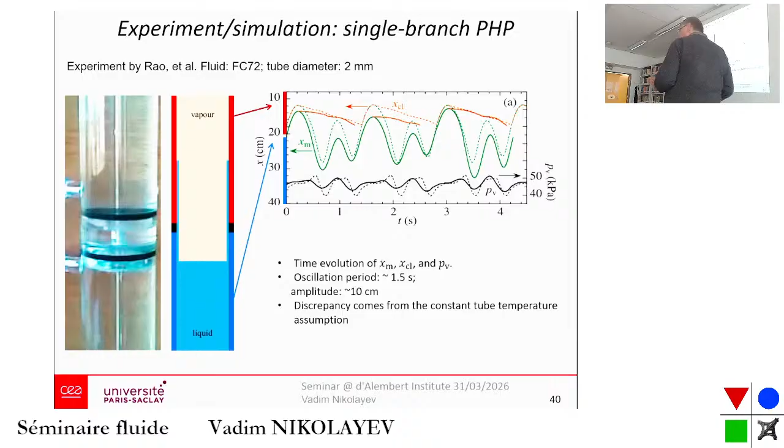The advantage of a single branch PHP with respect to the traditional multiple branch geometry is that you can measure in detail the positions, for instance, of the contact line, which is visible here - invisible in this video, but can be retraced from detailed image analysis. You can also measure the pressure inside the vapor bubbles, which is very important, so you can compare it with the simulation, and you find a very good agreement, much better than the agreement with the basic model we proposed before.

So this concludes my work. PHP is a device promising for multiple industrial applications. It's not widely used because of the absence of methods for its design, actually. It shows many interesting physical phenomena acting on length scales ranging from nano to meter scales. So 1D simulation remains the most promising way of designing PHPs.

And we proposed some studies. We did some studies around PHP trying to justify and develop models for the CASCO code. And the dewetting model is very interesting because it shows that the films usually vanish because they shrink, not because they thin.

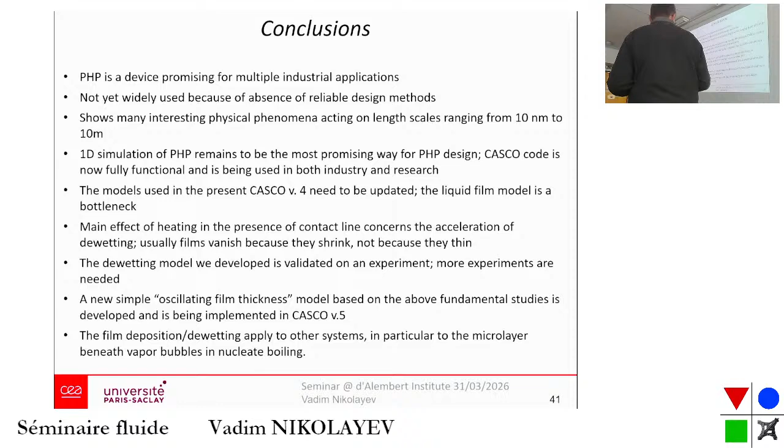And this theory is applicable to many other systems as well, in particular to the microlayer beneath vapor bubbles in nucleate boiling. So I'd like just to acknowledge the contribution of my former PhD students, Xiaolong Zhang, Vladislav Janicek, Laura Fourgeau, and Mauro Abella, and postdocs Jaroslav Nikrashevich and Slavin Bajic. And financial support of ESA, Airbus, and CNES.

So with this, I thank you for your attention. This is a photo of Saclay, a very old one. You don't have newer - nobody has, I think. Thank you very much.